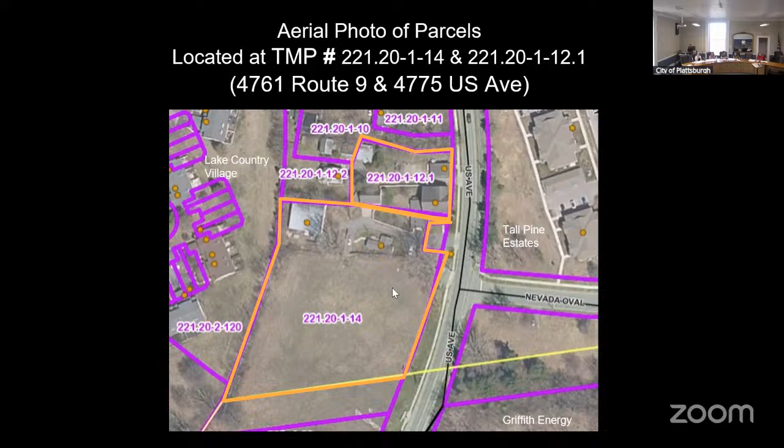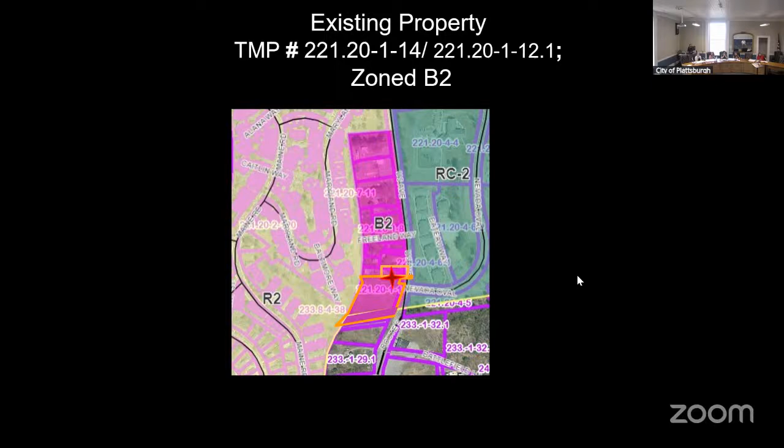And then here are the two parcels again, subject properties showing the zoning, and then property frontage photos.

And then I've got a copy of the proposed subdivision plan on screen, which is a little hard to make out on screen. I can zoom into different areas as the board may need, but you have full 24 by 36 copies of this in front of you and 11 by 17 copies as well.

And essentially, what this plan shows is a minor subdivision of less than 4 lots, which by definition could be qualified as a minor subdivision, and essentially the basics is an adjustment of the shared lot line to correct a nonconformity, which is the mobile home from the northerly parcel infringing on the southern parcel.

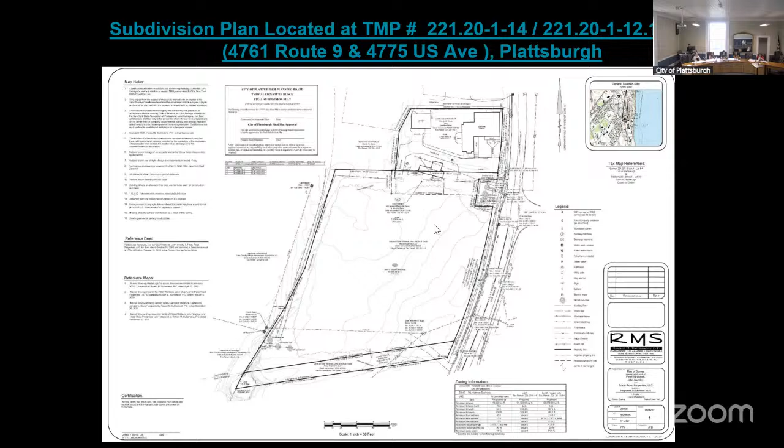And then here is a zoomed in screenshot of the proposed subdivision to show the proposed new 0.16 acre parcel that will be merged with the northern parcel, proposed lot 2. And create a new shared lot line between lot 2 and proposed lot 1, which would be the retained 2.33 acres for the Dollar General store.

And then there are pre-existing non-conforming attributes to proposed lot 2 that won't be further exacerbated by this proposal if the board decides to approve it.

And overall, the minimum lot area, or excuse me, the conformance will be improved as the minimum open space will be increased for proposed lot 2. And the mobile home, the existing home, will be fully within its individual parcel and meeting the required southerly setback.

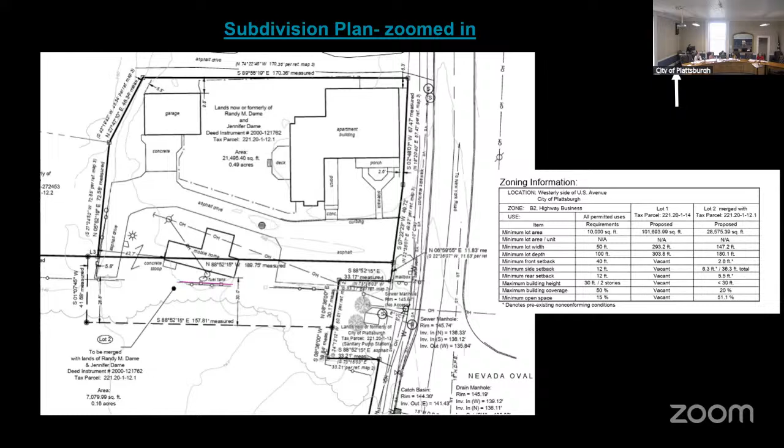It looks like I guess the west property line of the new plan is in a slightly different spot. In there, it looks like it runs almost parallel to that existing asphalt, and in this map that we're looking at, it's about 5 feet over, more. Doesn't run as close. I don't know if that has any effect, it looks like it's maybe been updated from that one to this actual one.

I don't know, I supplied the Tisdale Associates map, I'm not sure how they associated that mapping with the plan. Sure, right, yeah.

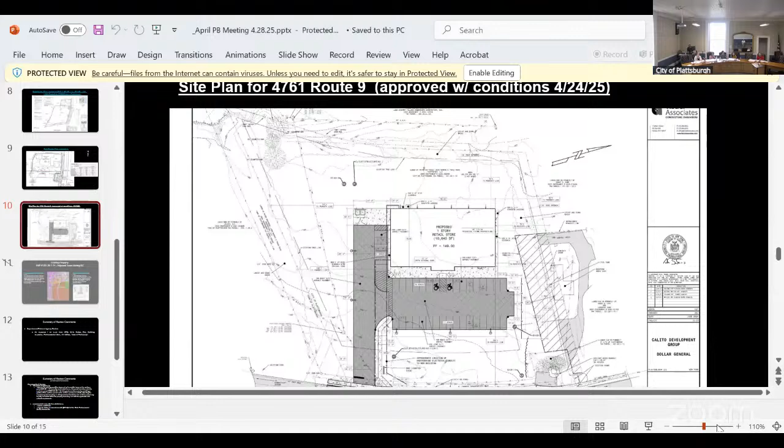If we zoom in on that one, is there a dimension or anything that's important based on where that corner is closest to the new building? Hold on, maybe I've got it back a little bit. No, it looks like that's an elevation mark or something. Can you see that?

Went down, up the other, but I understand your question, I'm just trying to scale it off with another one that I had there. Can you scroll it down some so we can see the northeast corner of the proposed building?

Yeah, the northeast. Yeah, I don't think that's a dimension. So if that's 20, yeah, it's greater than 20. Yeah, it's a 12 foot, it's the minimum setback inside yard. Yeah.

No response and no concerns from any of the referred internal departments, and no issues of concern or response from the county 911 office or the town of Plattsburgh.

For the planning staff review, as an excerpt from the staff report, the proposal appears to improve the existing conditions imposed by the mobile home on the northern parcel, parcel number 221.20-1-12.1, currently constructed across the parcel boundary onto the southern parcel, now number 221.20-1-14. It increases conformity by providing a portion of the southern parcel to the northern parcel, essentially adjusting the shared property boundary. So all improvements are located on the northern parcel, fully contained within the property boundary, and within the applicable side setback requirements.

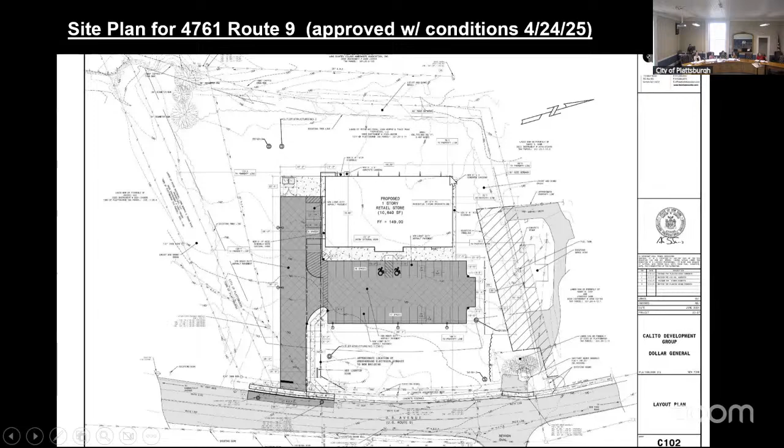Can we look at that site plan again, real quick? It's pretty blurry. I've been converting to JPEGs and all of my conversions have been coming out a little extra grainy lately. I'm not sure why, my screenshots have been better.

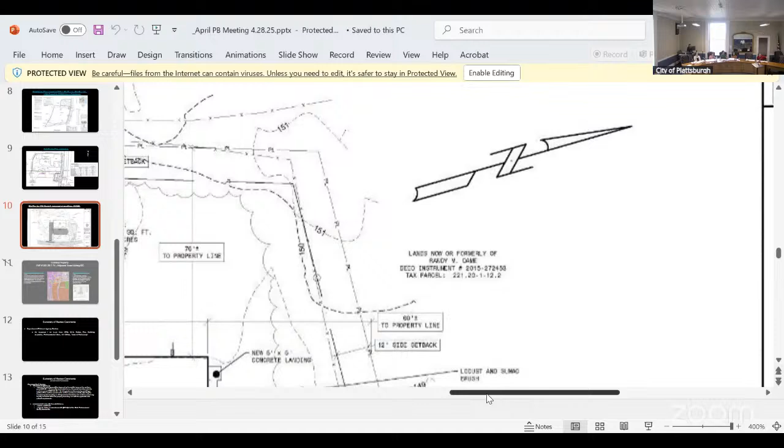I can bring the land use table up if you would like, or the site plan, if that would help. Dimensionally, it looks close to what Jeff's provided. I didn't remember who provided it.

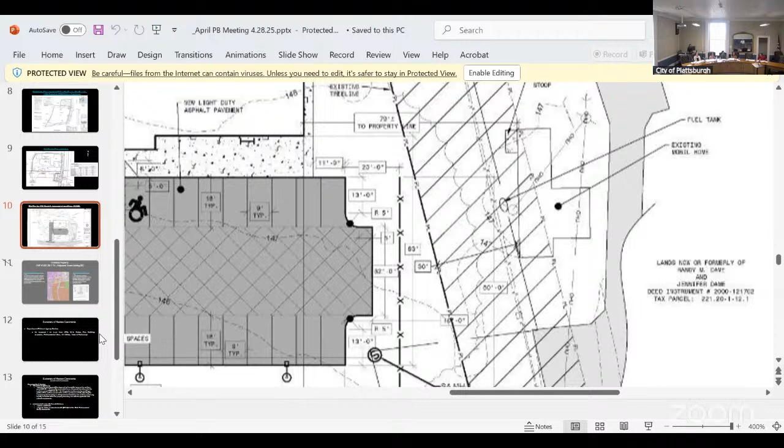Any other comments from staff? No. Okay, if not, Jeff Burns, you have the floor. At least you did a great job explaining it. This is not only benefiting deficiencies relative to zoning, but it's also remedying a civil issue with the encroachment.

So this is a win-win for both property owners and for the city as far as how they assess each of those properties.

Any questions from the board? No? Okay. In the pre-meeting we did recognize that you have a complete application, all the affidavits, application material. You presented a final plat plan or sketch plat combination. We have advertised for a public hearing, so it does appear that all criteria would satisfy the board being able to make a decision on a one meeting review.